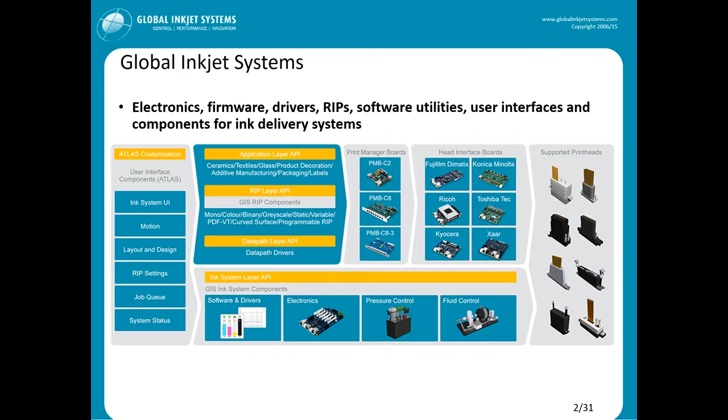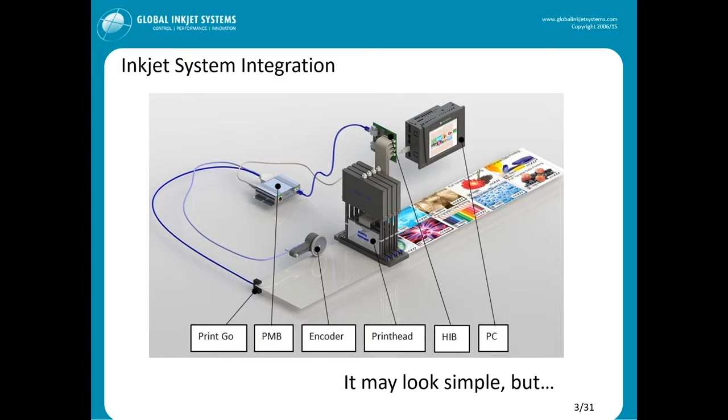Because although it may look simple, you take a head, you take some ink, put it all together, make a little single pass system. I mean, how difficult can it be? So it may look simple, and getting to that first print often doesn't take very long. We will work with customers that will be spitting ink probably within a couple of days of receiving all the different bits and putting it all together. And then the hard work starts.

And that hard work can take 6, 9, 12 months, maybe even more, depending on the scope of the machine that you're building and putting all those pieces together and getting it to work, not just for a couple of hours in the lab, but getting it to work 24/7 in a lot of the different industrial applications that inkjet is now moving into. And then when you've done all that, the end result is ultimately whether the customer is going to accept it. And that definition of print quality is so subtle.

There's all the qualitative definitions. Does it just look right? Are the colours right? Colour matching. Of course, is it functional? Do the barcodes read? Is everything really legible and sharp? But importantly, we've got some very good quantitative definitions that we can use of the physical parameters, of things that we can check right from the fundamentals of putting the machine together.

In terms of the drop placement, building the machine so accurate that you're going to be able to control as much as possible. The drop quality goes back to getting the right ink development and analysis right from the very start. All these edge acuity and line quality, how accurate is your system, and the control of the substrate in that. Optical density, and of course the functional attributes.

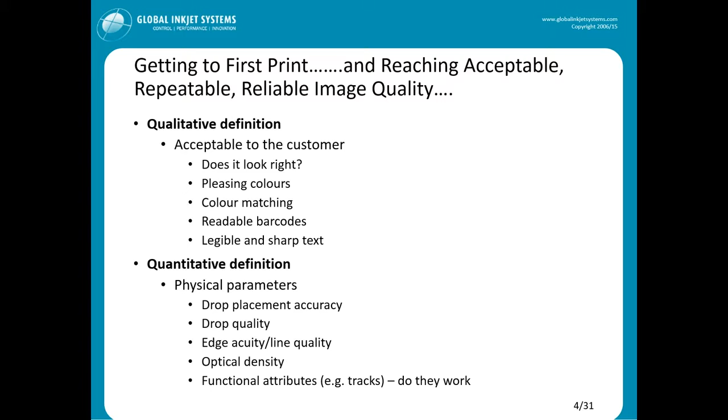So in the time allowed, I'm going to just pick one or two of these, just to give you a flavour, but you can always go back and refer to this. And there are lots of other presentations over these 2 days that are covering a lot of these other areas that I won't cover today in much more detail. For example, we had Martin Bailey from Global Graphics yesterday talking about screening. We've got Colorgate this afternoon talking about colour management. So there's lots of opportunities over the 2 days to get a lot more in-depth into a lot of these different areas. So I'm just going to touch on a couple of them.

And it all starts with the ink and the printhead. Printheads I'm not going to talk about in a lot of detail; we've got other presentations on that. But what often surprises us is how people often take the ink and the fluid just as a given, and yet it's absolutely fundamental. We work with a lot of the ink and fluid suppliers because they are so important to the market. If we don't have the right fluids and inks to jet, none of us have a business.

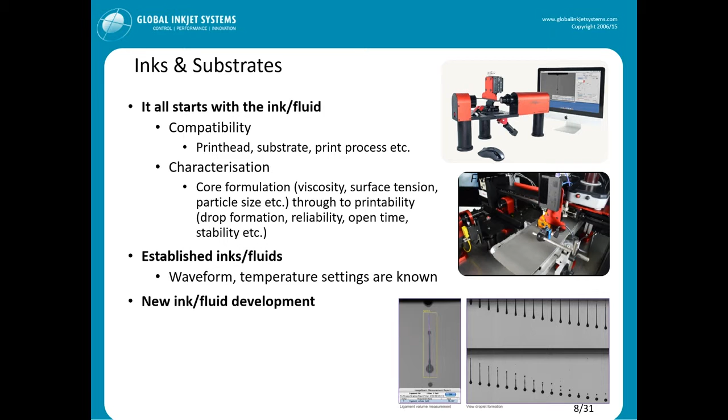But if you're trying to take something from an industrial fluid and adapt it to inkjet, if you miss out this process, you're never really going to understand the fundamentals of the problems you're going to see further down the line. It's a step you simply cannot avoid and shortcut. Because if you start jetting with a fluid and you don't really know whether you're getting good drops out of it and start putting it onto a substrate, you're going to start seeing problems. Now, is that problem because you've got an issue with the substrate interaction, or is it fundamental with the fluid? So you've got to do this in a step-by-step way.

And that was one of the things that Steve just mentioned that is covered in that practical course, where you can take dyne pens and see how they show up the surface tension on different substrates, and then you can take those substrates, treat them, and then see how it changes, and then it will work. And the other thing also is you will find that you can take maybe 3 different UV curable inks, try them on the same substrate, and you will get different results. There's nothing wrong with those inks. It's just you need to understand that they all are slightly different and will behave differently on different substrates.

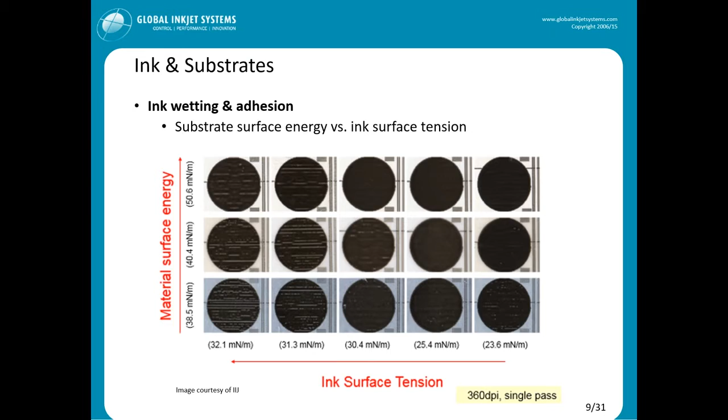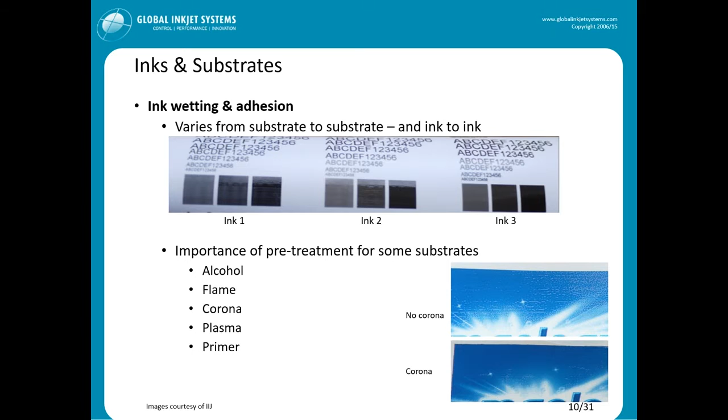So then moving on to some of the more mechanical issues that you can come across in a system, in particular encoders and media control, and then also ink systems. So accuracy of substrate movement: again, we've seen just last week how now there are lots and lots of different hybrid devices at Labelexpo, people putting print engines inline with flexo machines. And that's been done for quite a few years. Now it's really becoming an important trend. You couldn't go anywhere at Labelexpo last week without seeing a hybrid type device in every hall.

And it's not as easy as people may think of just putting it on that line and having it work, because you need to understand that what is good, accurate movement for a flexo press with the analog process doesn't necessarily translate straight away into working perfectly with inkjet, because any sort of sideways movement will cause an effect on the output, even 0.1 of a degree. And again, here, this is a really good test that John Corrall from Industrial Inkjet showed me a few years ago now. And if we could play that video, please.

What he did is he just put a credit card at an angle onto a web and looked very carefully at this gap. And you'll soon get really just a nice visual impression of how accurate that web is moving. It's a very simple test.

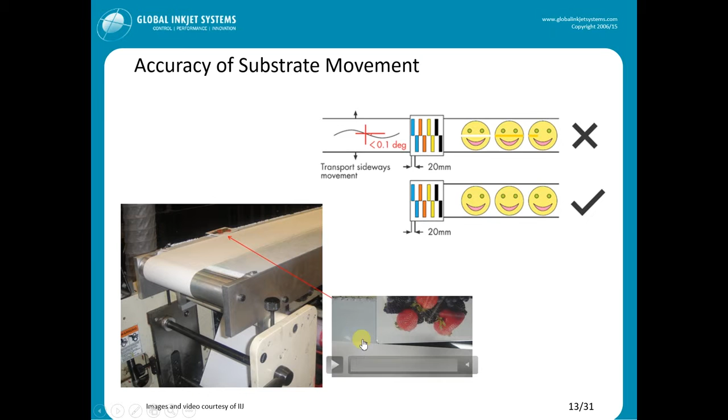Another area that is a relatively low cost, small, seemingly inconsequential part of a system is the encoder. They don't cost a great deal. People still try and save a few pennies here and there. It's worth getting a really good encoder in your system, because the encoder is responsible for regulating all of the printing by determining how much the substrate has moved relative to the printhead. So it's really important. And choosing the right type of encoder and maintaining that in the system is also something you need to look at regularly.

Because if you're using a linear encoder, like an optical or magnetic type, if you start getting problems in registration, it could be that the detector is lifting off the strip. The strip could be getting dirty and you're not getting an accurate reading. On a rotary or shaft encoder, the positioning of that is very important relative to the printheads. Sometimes we go and look at systems and the encoder is so far away from the printheads, there's a great potential for margin of error because of that distance.

Similarly also, a poor quality one, or even over time, you can get some wheel slippage, and that will also cause misalignment. Or the substrate may be stretching or bunching as well, which can cause problems. And the resolution of the encoder is important as well, and it's often only maybe an extra $100 to get a high resolution encoder, and it will improve the results of your machine. And encoders can be very sensitive to signal noise, and poor wiring can also affect it. They're very simple things, but they can have a big effect on the system.

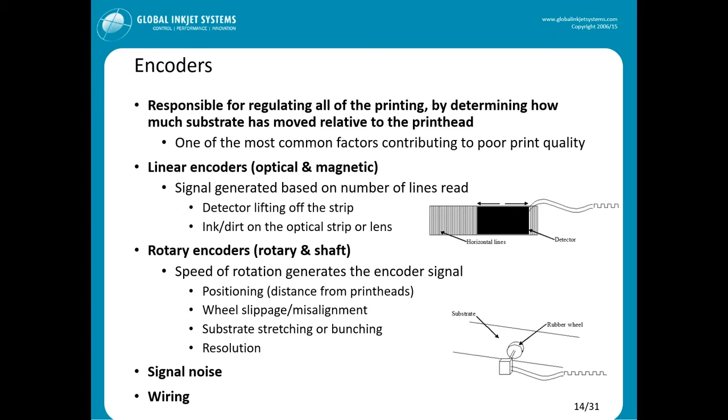And one of the effects that they can have, amongst others, is you have problems with color registration. It's not always so visible on monochrome systems. As soon as you move to color, you can potentially see this, because again, if the encoder is not accurately reporting the movements of the media, then this is what's going to start happening. You're going to get misalignment and slippage.

The media control, as I mentioned earlier, is also very key, because on webs, media can stretch or it can slip, or the acceleration might not be smooth. And again, you will start to see these sort of errors where you get a partial or even a no dot overlap. And of course, then there are other things very fundamental, like the system setup itself. If the printheads are not aligned mechanically correctly or even offset properly within the software, you're going to have issues.

And of course, the other thing Shane O'Neill spoke about yesterday is the higher speed that you get in systems. This is always something that can have an effect on the jetting parameters and the flight of the drops. There are so many more things now that need to be built into these systems.

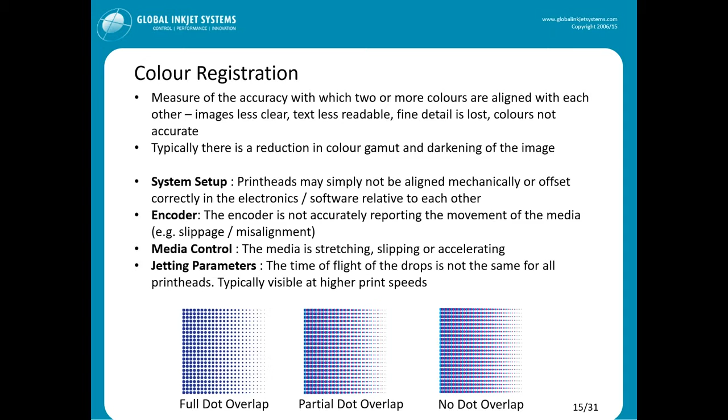Dissolved air within the ink is something that has been an issue for a long time within the industry. It's a well-known issue. But again, not everybody uses degassing. They should do. It's absolutely essential in an aqueous-based ink. But we're also seeing people now starting to use it to a certain extent with UV inks, again, to try and just get that little bit greater measure of reliability. And having the correct tube material: we've seen systems where they're using completely the wrong tubing, and it's actually bringing in air into the system.

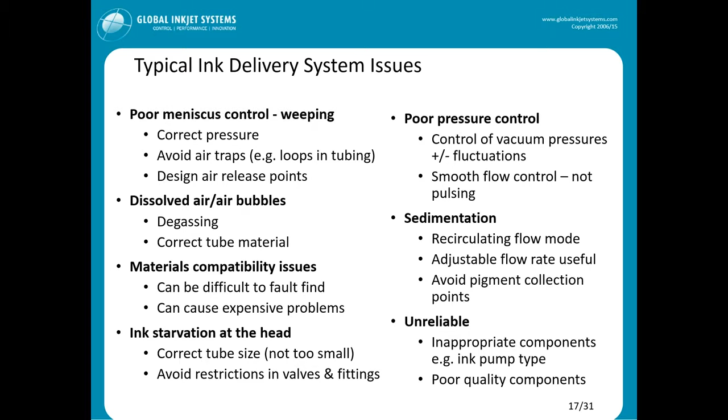I've talked about flow modes and recirculating. So just to recap, a lot of heads don't need any recirculation. They're what we call no flow. They're end shooter. You'll hear all these different terms. And that applies maybe to a Konica Minolta type head, or a Ricoh, or a Kyocera. It's an end shooter. But those printheads often can work in a low flow mode as well. And that can often be beneficial depending on the inks that you're trying to jet.

So even though you might hear about a printhead being called an end shooter, it doesn't need recirculation, it can often be made to do that because it's got the in and the out inlets for the ink. And if you're using a white ink, for example, or a functional fluid, some sort of gentle flow can often add that extra measure of reliability. And you can just do that with just a height difference in the chamber. If you're talking more about a XAAR 1002 or a Fujifilm Starfire printhead that really need what we call an adjustable recirculation of the ink, then you need a system that has good pressure difference control within it. And there are different configurations.

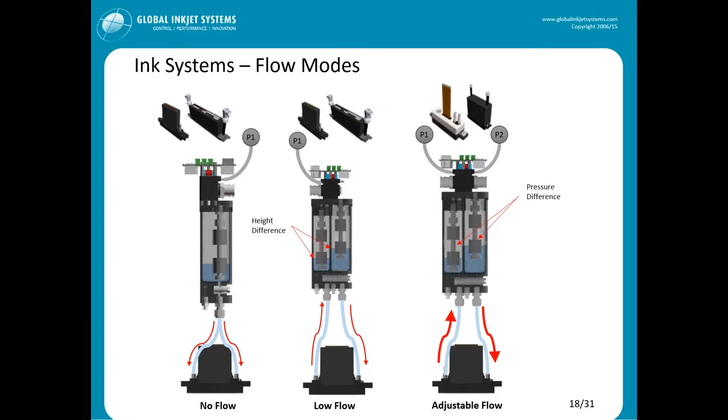A good ink supply system certainly can add cost to your end machine. So it makes sense, if you're doing a CMYK, you can just have a shared pressure control. If you're working with difficult fluids, or you've got a very large system with very large wide bars, you're probably going to want to have independent pressure control on every ink. Or you could even mix it. We've got customers that have gone for CMYK with a shared, and then they've done the white with a low flow and an independent pressure control. So you can mix the systems and choose what the best is to get the optimum reliability.

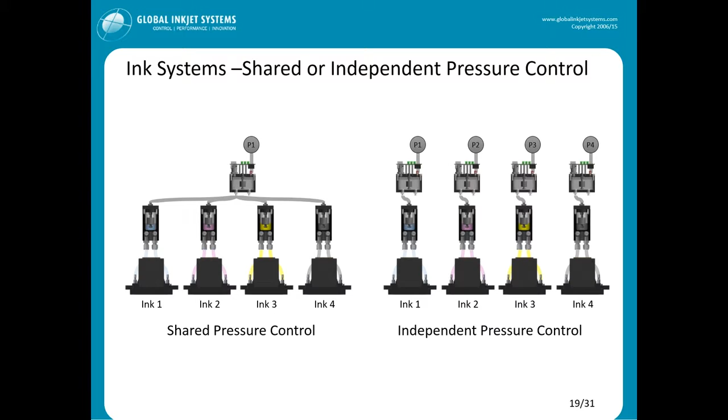And as systems get larger, the whole issue of stitching printheads becomes more and more critical. We all know scanning is traditionally known as safe and reliable. Your errors are recoverable because you can multipass. But the trend for higher productivity is for single pass. And of course, this is one of the areas that probably up until 6 years ago made people very nervous about using inkjet in single pass. But so much has developed now in terms of jet straightness and the reliability of the printheads, which is why the single pass market has exploded so much. But it's still an area of concern.

And what we're finding now is that more and more printheads are getting smaller and smaller drops. 1200 dpi was the sort of the big bars at Labelexpo last week. Printheads jetting tiny, tiny drops to create beautiful output, but it doesn't come without challenges.

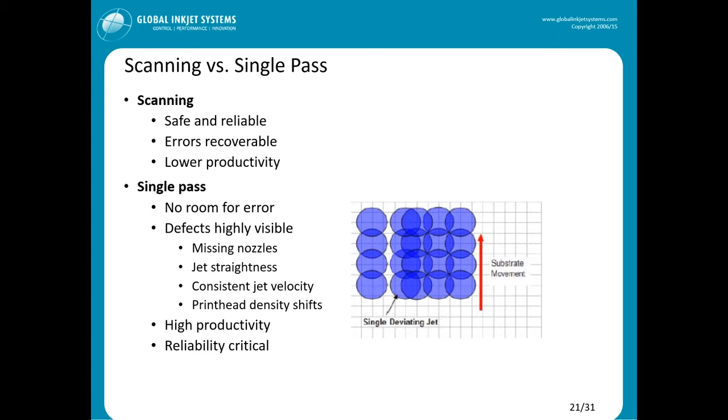There are a number of different technologies. We have one in software where we can actually compensate for a missing nozzle. It doesn't work if you've got two nozzles together that are blocked out. But if you've got one nozzle in one area and one in another, there are a few tricks that you can play to disguise where that nozzle has gone.

So with a loupe, you can certainly still see where you use this technology. But it's a good medium-term way of extending the life of a printhead until you can maybe swap it out or do a service call or a purge.

Similarly, as you get large bars, it becomes more apparent that there's often a small amount of non-linearity in the drop volume across the length of a printhead. When you're doing XY, it's less apparent. But it becomes much more apparent when you've got a very wide bar of printheads, and disguising that join becomes more and more difficult. There are techniques to be able to compensate a little bit for that non-linearity.

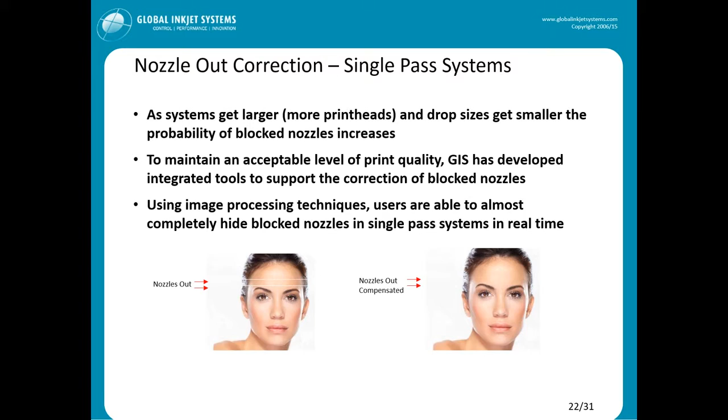We can do it in software, and there are other techniques as well. So again, exploring all the options and all the capabilities that are available from suppliers is very important to optimizing your system. And we talk a lot about printhead stitching because it is so important.

I mean, even last week at Labelexpo, we could take print samples that people were giving out, and we could still see stitch lines. Not that visible, but they were still there. If you really looked for them, you could find them. And it just shows how difficult it is.

The other thing is also, people tend to avoid giving out print samples with large areas of flat colour, because it's so difficult to disguise the stitch in those areas. So if you see somebody giving out nice big solid areas, they've got that confidence that they've solved and beaten all these different issues.

And so naturally, the more area of overlap you've got in the printheads, the easier it is to create a good stitch. But of course, that's more expensive. It means you're going to have more printheads in your bar. But the other thing to bear in mind is, different stitches will work better on different substrates, different printheads, different types of systems. And so it's important to play around and understand the output that you're getting from your system.

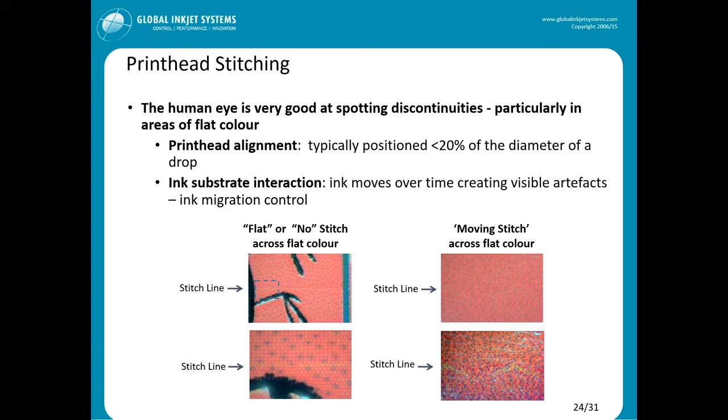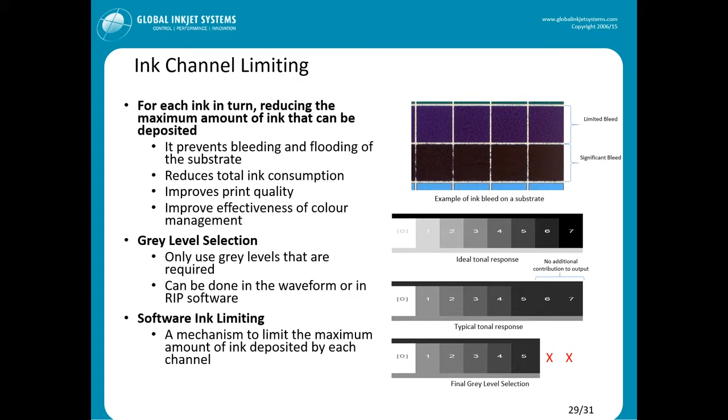Here you've got an ideal tonal response on your 8 grey levels. It's a nice, smooth growth in the tonal response. But this is often more typically what you get, where there's a bunching here at the top end. So you're not actually going to gain anything if you use that 7th and 8th grey level there. You're actually going to get a much better output if you simply reduce it down, so you're not flooding the media.

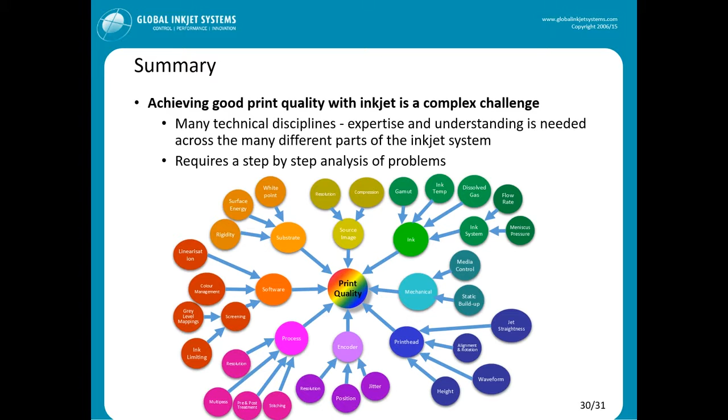So that's my quick introduction to just a couple of the different areas that are important. And as Steve says, if you're going to build an inkjet system, you need to have knowledge and expertise, ideally, in a whole range of different areas, so when you do run into problems, you can go through and analyze things step by step and systematically. So inkjet is a wonderful technology. Everybody would be successful if it was really simple. The nice thing, I think, is actually it isn't that easy, but there are great tools and people out there to help you build a good system, and I hope this has been useful.